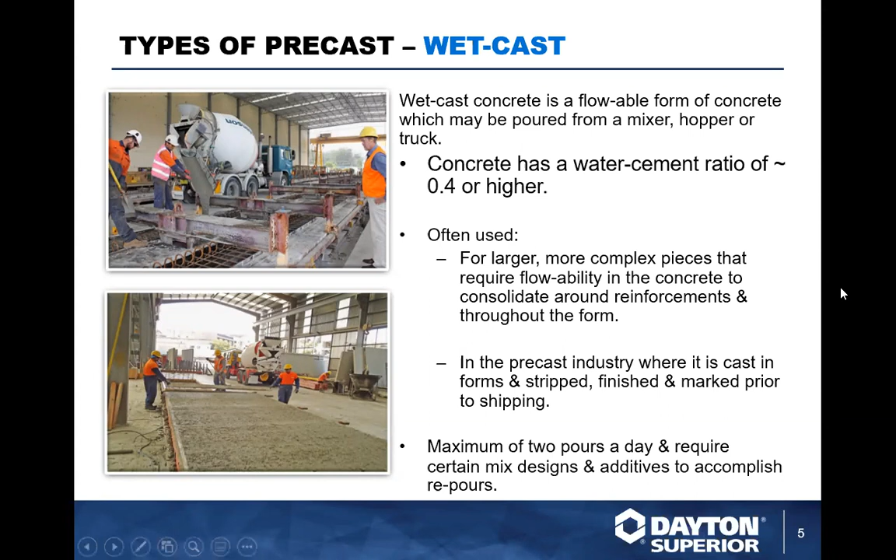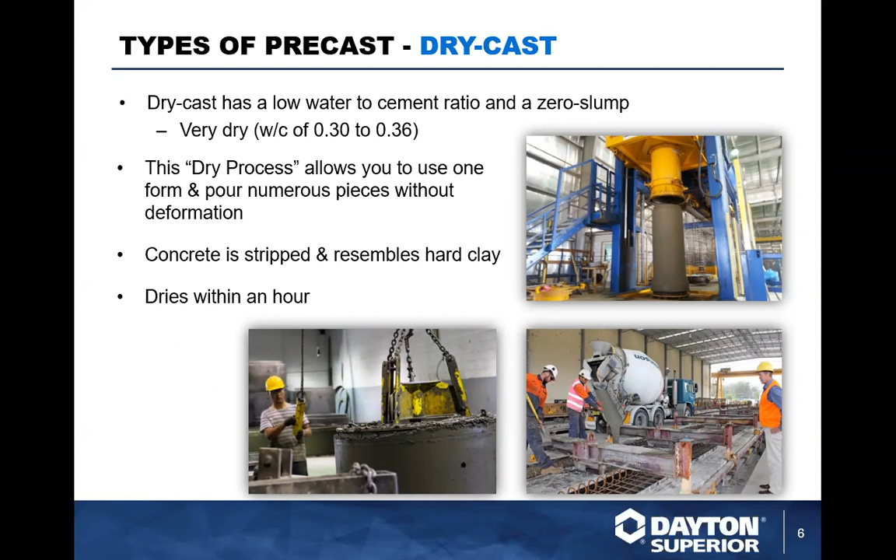So different types of precast markets that we service here at Dayton Superior. Architectural precast is a big one. This is going to be your wall panels, your cladding, fascia, beams.

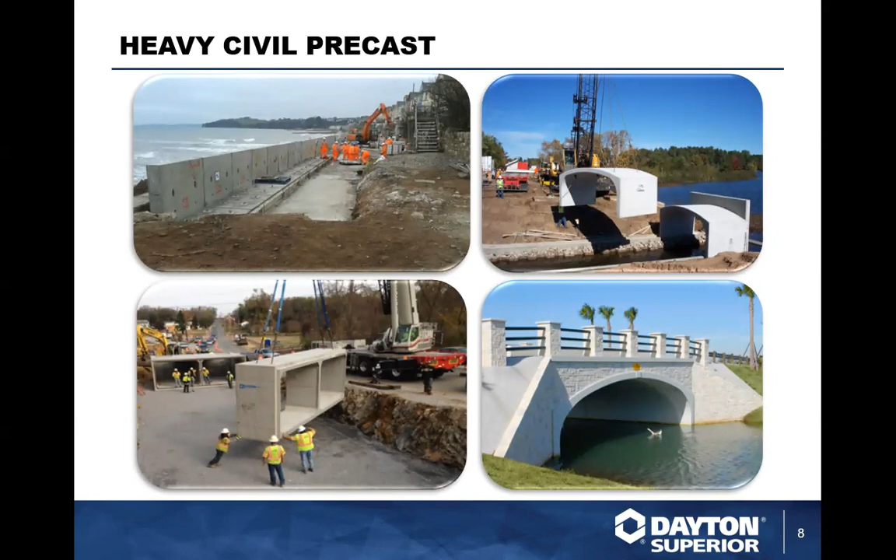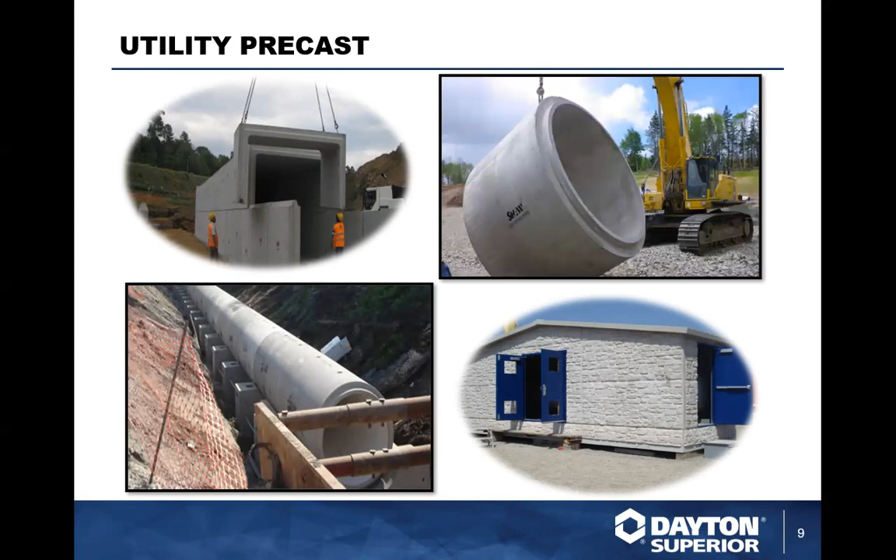American National Standards Institute, American Concrete Institute, OSHA - what these provisions provide us with is a standardized set of technical data, the most important of which is our safety factors, which is important to understand. For precast, most of our inserts are going to be at a 4-to-1 safety rating.

That's specifically designed because precast is going to be utilizing these inserts and anchors multiple times. A higher factor of safety prevents any issues from arising due to impeding upon the mechanical ultimate loading of any of these inserts. So 4-to-1 is pretty significant. If you have, for instance, a 20,000 ultimate on an anchor or insert, 4-to-1 would then reduce that 20,000 to 5,000 pounds, giving you quite a bit of overhead.

Looks like Heidi's got me with some animations here and timers. I'm going to go back here.

For 2-to-1, you're going to see that primarily in tilt up, where the anchors are going to be engaged a single time on the crane. So you'll be putting your panel down right there on site, attaching to the crane and erecting. Whereas precast, you're going to be removing it from the formwork internally in your plant, loading it for shipping, removing from the trucking, and then finally placing that.

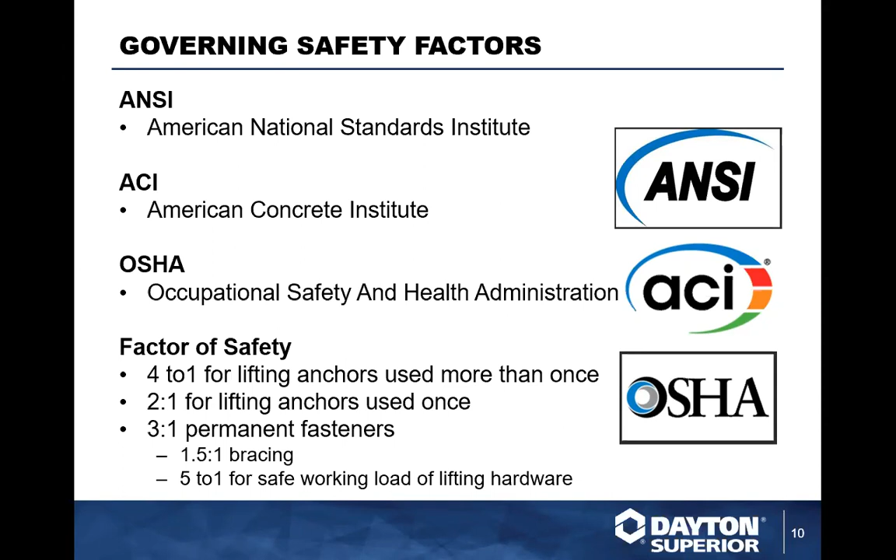So now we'll get into the systems. This is just a broad overview, so we'll just talk about some of the benefits and defining features of each of these.

The lifting hardware as well is very varied. We have eyelets, eye bolts, lifting wire ropes, angle irons, and swivel lift plates that can then be used with a coil rod or coil bolt to engage with your rig, or to engage the rigging with your particular insert.

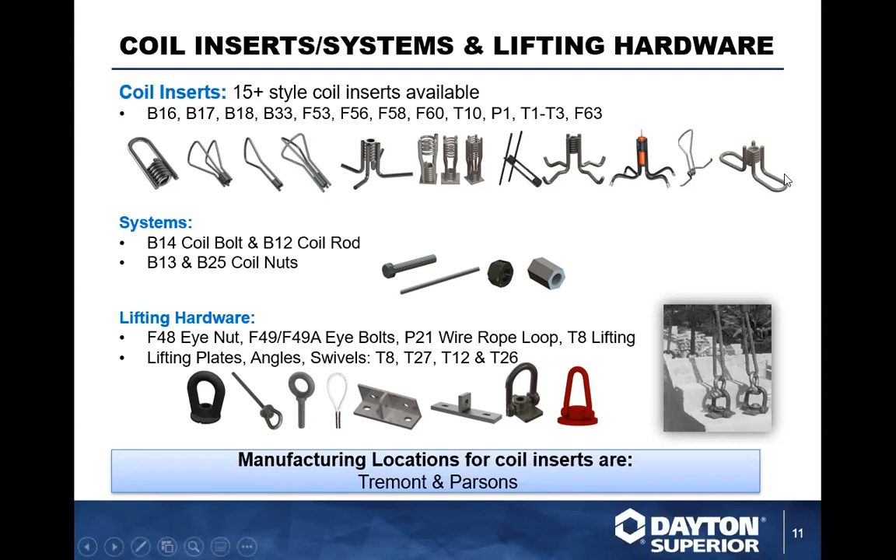We do make all of our coil inserts here domestically. It's listed here as Tremont, Pennsylvania, and Parsons, Kansas. So if you have a project that is federal or has a Made in America clause or BABA attached, Dayton Superior, we've been providing these domestically since our inception. So you never have a question there of whether it's import or domestic.

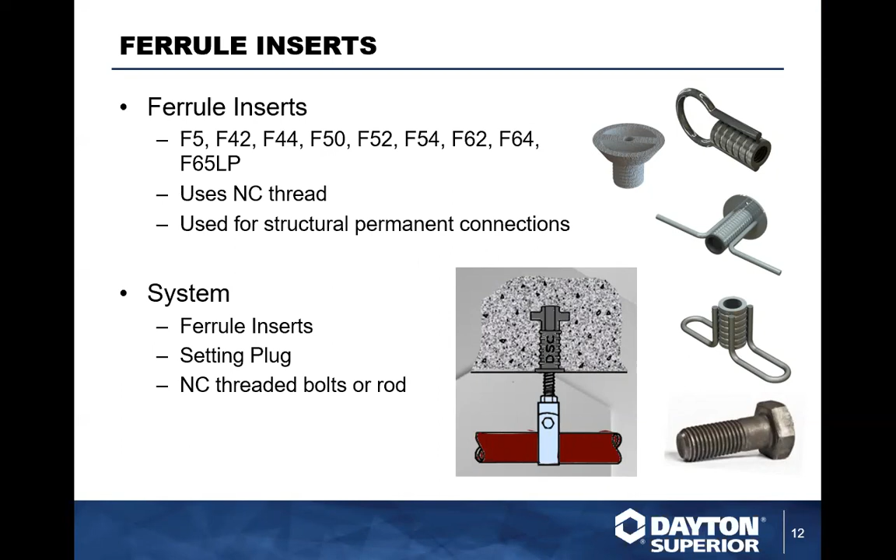Now we'll get into our Swiftlift system. This is primarily found in utility and heavy civil precast. We've been providing this particular system since the 70s. It utilizes a forged anchor, always using that 4-to-1 safety factor for the anchors themselves, with the clutches providing that 5-to-1. We've got a number of tonnages available, all the way from 1 ton up to 20 ton.

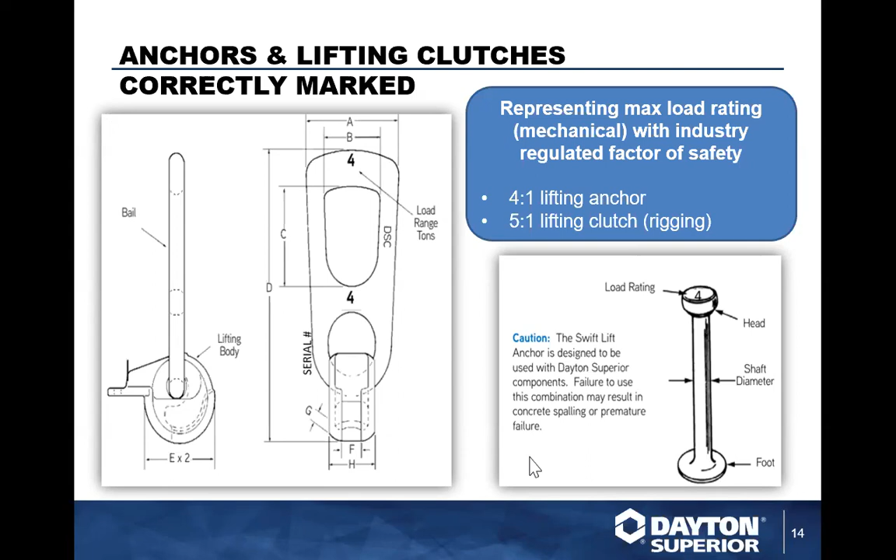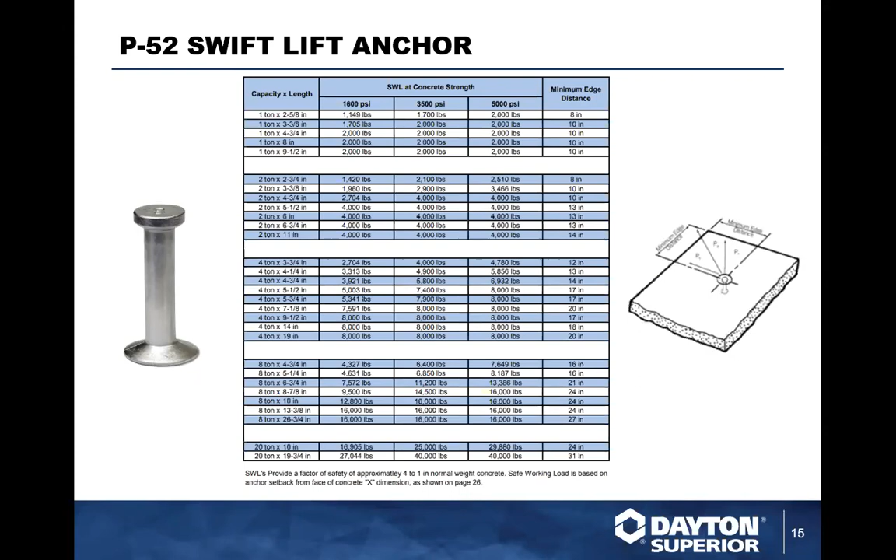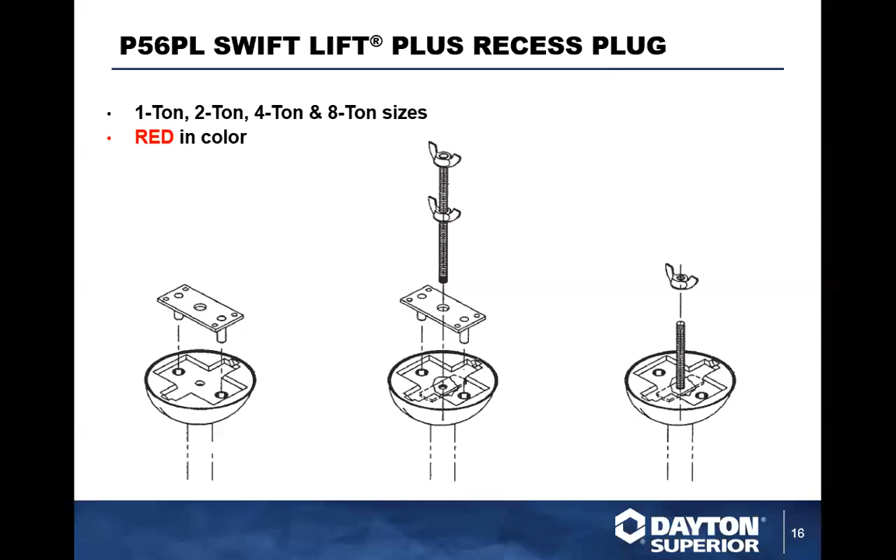Fleetlift is our second major system for precast, pre-engineered anchors. What pre-engineered means here is that this is more complex, whereas the Swiftlift system, the dog bones, is pretty straightforward, a single design. These Fleetlift systems allow you to really fine tune and tailor each selection to your particular application. It's still a quick connect system that's easy to install. There's no cables or exposed steel to cut or cover.

Again, just like our Swiftlift system, we separate these out into different ton systems, all the way from 1 ton up to the 12 ton of some of our forged anchors. With the Fleetlift system, whereas Swiftlift has a single tonnage, our Fleetlift can be confusing at times, but it's not too difficult. We have a 1 to 3 ton anchor that matches a 1 to 3 ton range on the lifting hardware, and that goes the same for the 4 to 6 ton and the 8 to 12 ton.

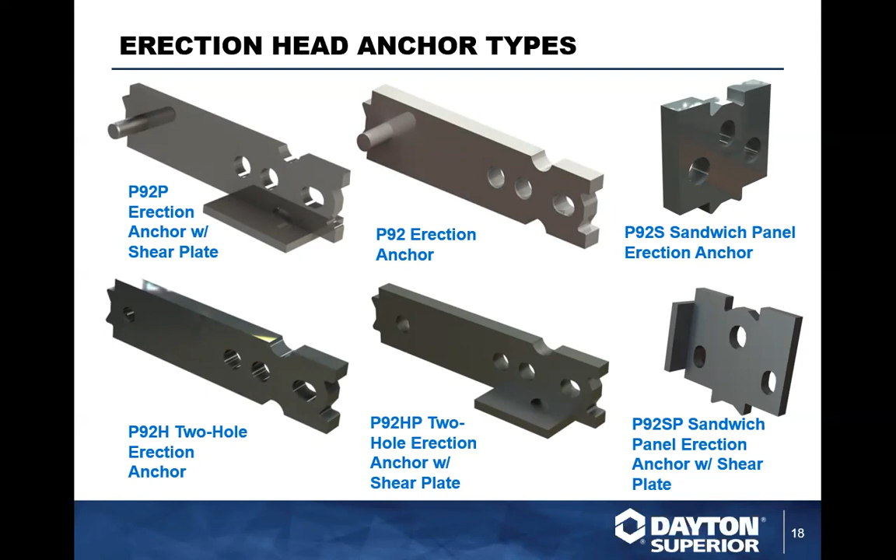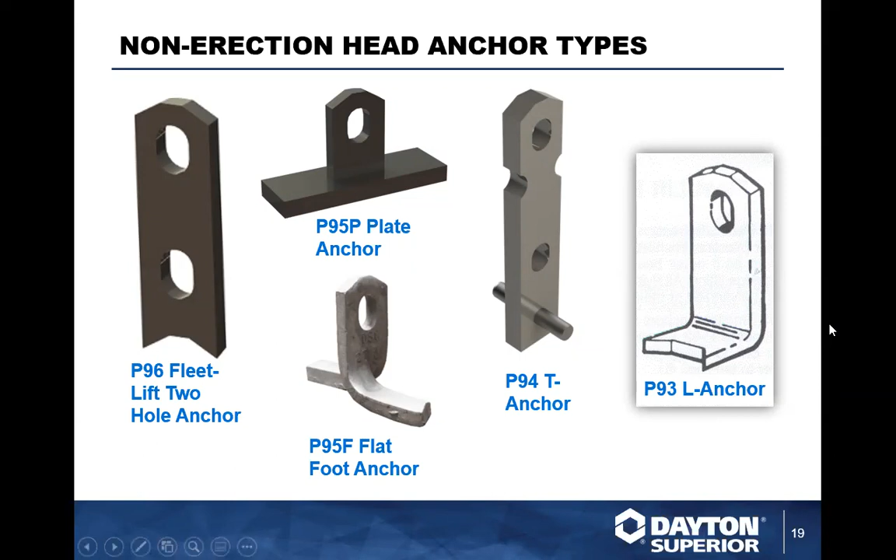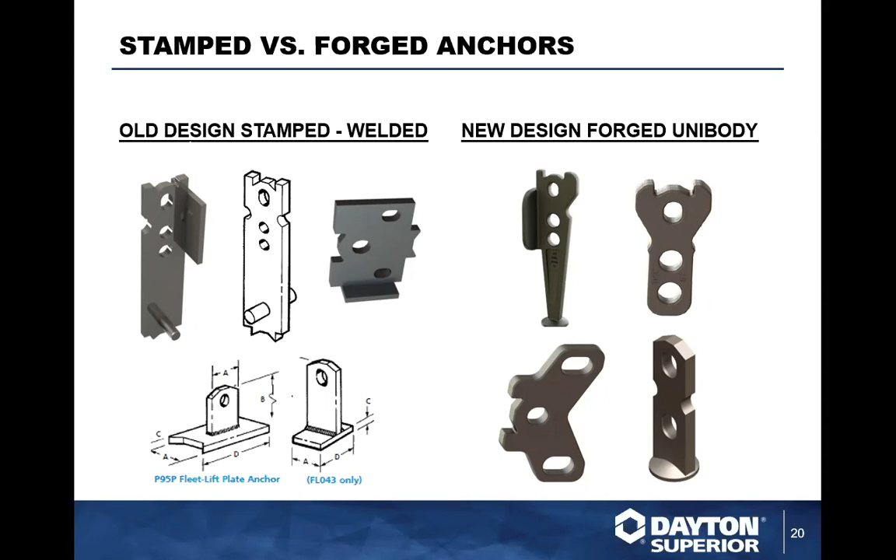Now, the pictures we showed of the Fleetlift items up to this point were all stamped steel plate. You can see those on the left here. We also offer forged designs for our system. A lot of these have similarities in design and shape and function between both. A lot of it comes down to personal preference, but there are a few benefits to going with forged over stamped steel. One is they just perform better, they're stronger than their stamped counterparts. The forged metal does offer a bit of protection, even in plain finish, to corrosion and rusting. And there's much less embrittlement with low temperatures if you're a precaster or contractor in a more northern state for 6 months of the year, if you're from Minnesota.

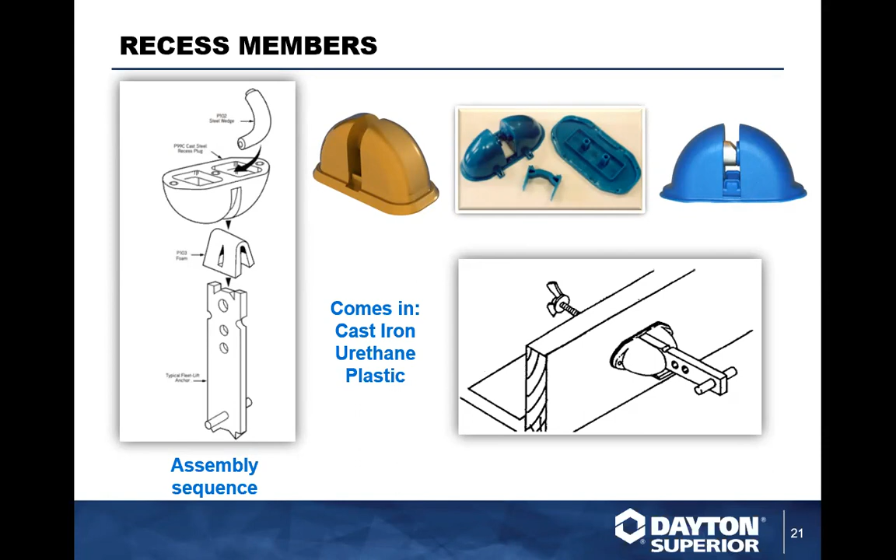You can see here in the bottom right, the holding hardware, the holding rod with the wing nut. That's a typical application for a side form connection. The steel utilizes a wedge and a piece of foam to prevent concrete intrusion.

Lastly, we have our catch-all-ish sort of utility anchor system. These systems do not require a particular lifting and handling clutch like our Swiftlift and our Fleetlift. You'll see this a lot in utility work, pipe producers, box culverts. So we called it our utility system.

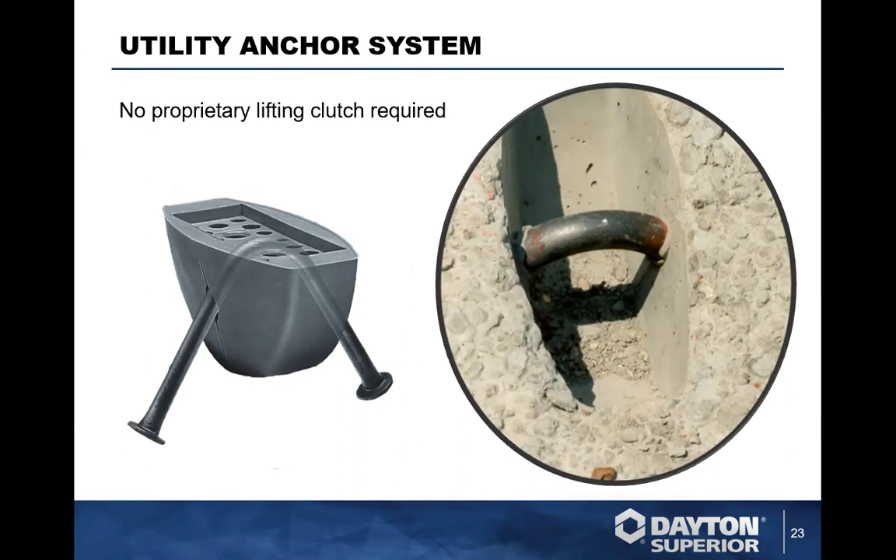The main anchor here is our P75, which is very similar to the foot design of the P52 Swiftlift dog bones. But you can see the boomerang shape here allows you to attach a hook or clevis to this anchor, and you will not have to go out and buy a particular clutch to interface with the system.

Here's an example of a few examples of the hook and the clevis. Precasters seem to like this because you're no longer having to provide that lifting hardware from your plant to the erection or placement contractors. Any contractor on site will be able to use what they have on hand to lift and move these products.

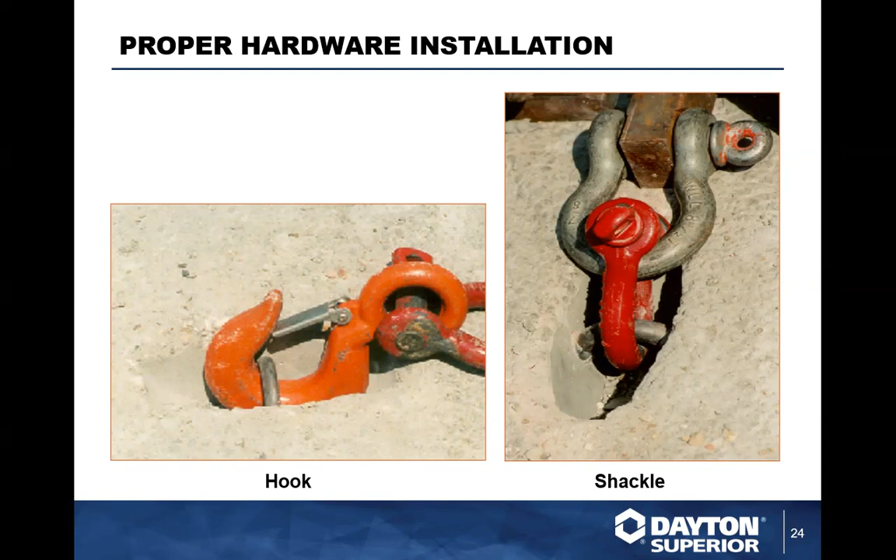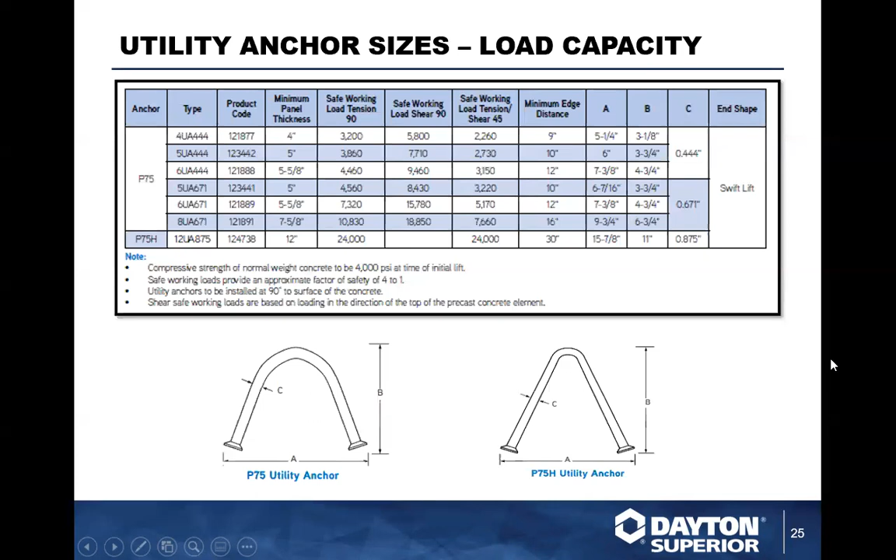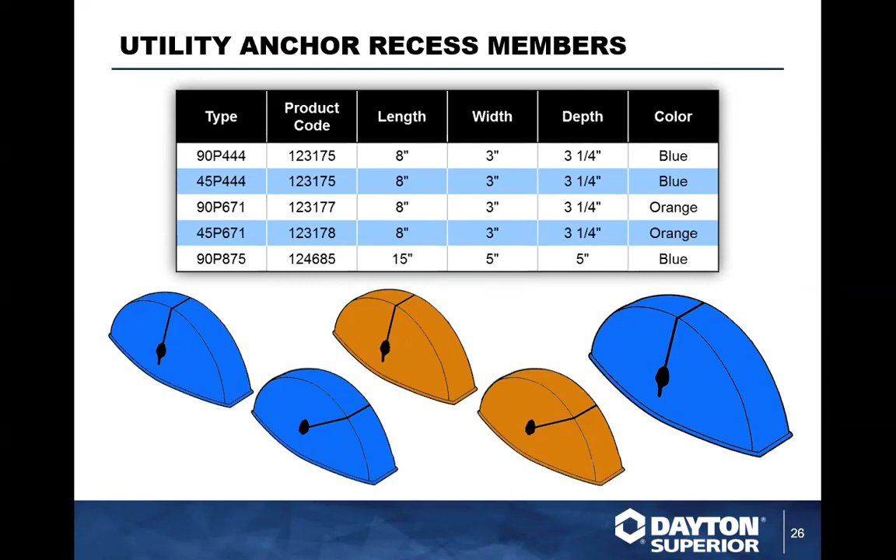We do also offer, based on what kind of hooks or clevises you have on hand, some of our standard depths may be a little tight. You don't want your lifting hardware touching your concrete surface. So we do also offer a wider and deeper recess if you're using larger hooks.

This is a relatively new anchor, the P75R, very similar to the P75 series. These were designed for lifting and handling retaining wall blocks. There are a few producers out there, or licensee systems that you may be familiar with, that do larger retaining wall blocks.

These can either be wet set, with the anchor extruding out the top of the block, or you can utilize our P76R to set that back from the concrete surface. We've got a number of sizes here based on your particular need with the depth available or the capacity that you need for each lift.

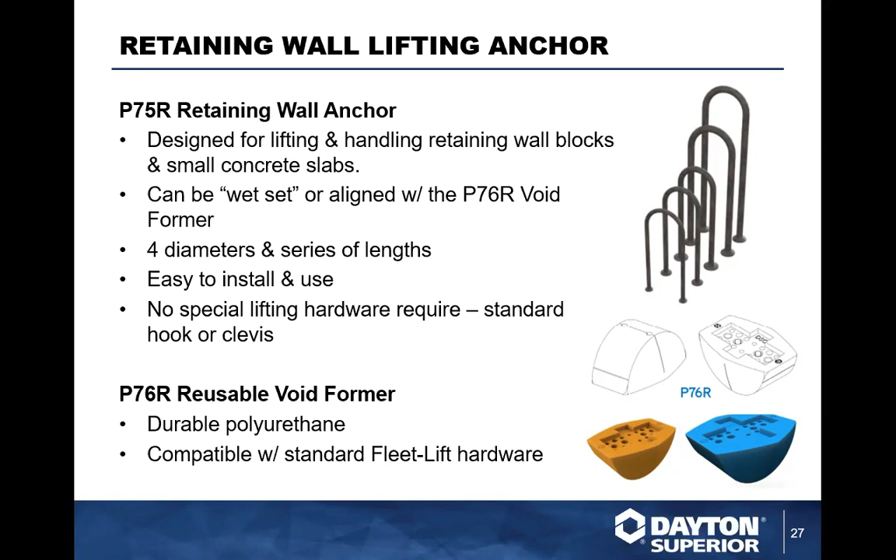You can use a standard hook and clevis like our other utility system, but we also made a point to design these as being compatible with our Fleet-Lift ring clutches. So if you're already a user of the Dayton Fleet-Lift system and you're doing some of this product on the side, those can also be used to lift and handle these P75R products.

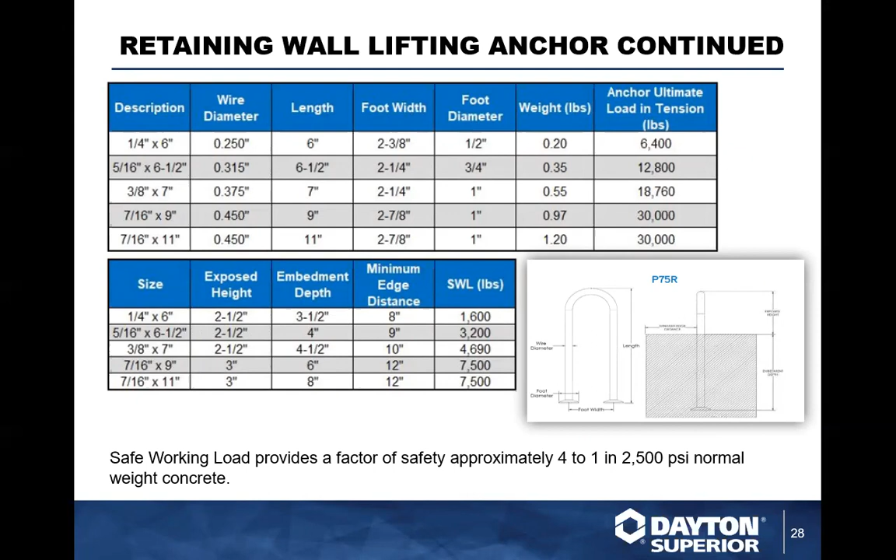Our P110 wire ropes are also part of the utility category here. Again, they can be used or utilized with a hook or a clevis. These are very economical. Basically, you're wet setting these wire ropes down into your product. You're then connecting to the top of the loop with a hook, and then you can either leave that exposed after placement, or cut off and cover, patched on site.

They are galvanized wire ropes. There will be some protection for storage and things like that, although I do see most out there either cutting or coating if placed out in the field. You're going to see this a lot in smaller precast items, risers for manholes or small lids, but they're an economical option if capacity isn't a major concern.

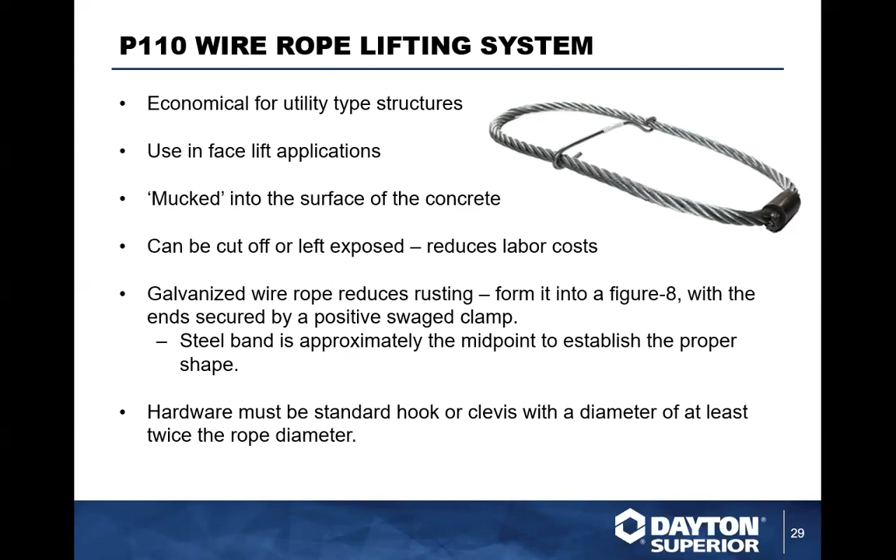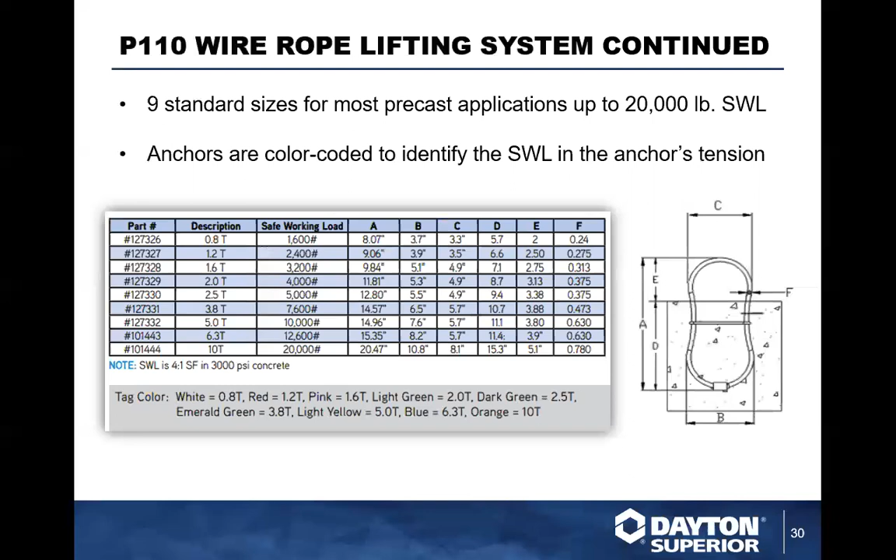Each one of these wire ropes has a color coded tag as well, just to help your teams identify that the proper product is going into each one of your pieces. So those colored tags will delineate which tonnage is being used.

And it appears that that is the end of our broad overview. As I mentioned, if you wanted to reach out to us or the training team for any more specific or personalized training, please do feel free to reach out to me or Heidi and Chuck. But I'll give it back over to Heidi here.

Thank you. Thanks, Taylor. Appreciate that.